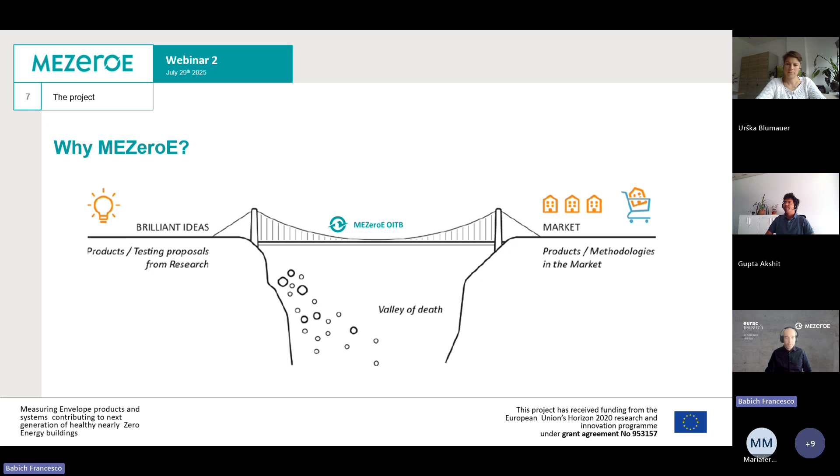The motivation for this project was the fact that in the construction sector, and in particular in the envelope sector, very often there are very good ideas, but they barely reach the market, or they even don't reach the market at all. The European Commission used the image of the valley of death to say that essentially they die before even reaching the market in many cases. So the idea is that the open innovation testbed will create the bridge to make sure these good ideas become products available on the market, with better opportunities for companies and society.

And indeed, the overall aim of the project is exactly this: to create this open innovation testbed with a focus on envelope solutions, and to make sure solutions can reach the market well exploited, well studied, and as fast as possible.

The last two slides are about the three main pillars of the technical offer of the project.

In European jargon, technology readiness level means essentially how close a concept is to a market-ready product, where one means you just have a basic idea, even the principles, and nine means it's ready on the shelf.

With the project, in particular with the laboratories, the red arrow shows we go from TRL 2, just a bit after having a principle, to relevant environment testing, which typically means semi-controlled laboratories. Then we move to TRL 7 and 8, moving to operational environment, meaning real buildings, and that's the focus of today.

Then we have the other three services, which cover standardization and marking as number one. Number three is about support for open innovation uptake in the life cycle. And number two is what we are going to discuss later in more detail: the evaluation of performances in real buildings, which is complementary to providing the buildings.

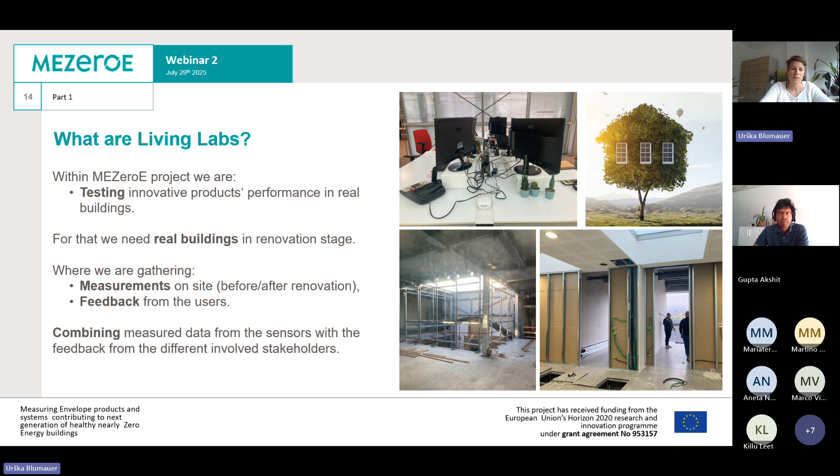Within the project, we have established 3 different levels of living lab test sites. The first step, the pre-step, is done in a laboratory - this was covered in the previous webinar, where the functionality of the products is tested with specialized testing facilities. Now we are adding user interaction.

So within Living Lab Test Site 1, we are testing technology validation, and this is done in lab buildings that are in use. These are usually homes or setups that a laboratory or research institute has, where you just install your product, it's tested for a period of time, and then it's changed and other products are tested there.

The next one is Living Lab Test Site 2, where potential stakeholder validation happens, done through a demo building. This demo building was also set up within this project. We will show you one of these test sites.

And the last one, the most extensive one, is user validation, where we test products in real buildings. These 3 stages also depend on the project's product readiness level. Within the project, we already had 9 industrial partners involved.

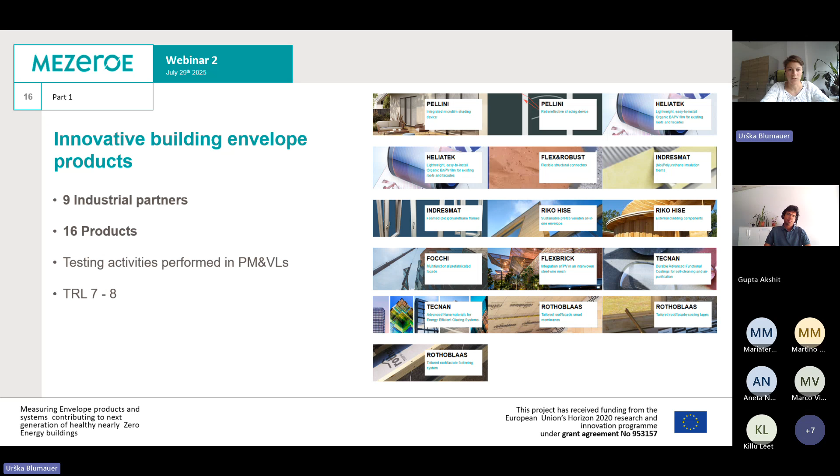They were providing 16 different products that you can see here, and they were in a stage of TRL 7 to 8, so not already on the market, but fully tested within the laboratory setups, and now we wanted to see how they're performing in real building. So they were already part of the project.

The next one is the Living Lab procedure. Here we identified different stakeholders and their motivation, because this environment includes building owners, product manufacturers, the framework that was developed here, and then management team, monitoring and evaluation team, and other stakeholders. We also set up managing this process from building owner application to the Living Lab test site, and then at the end, when everything was confirmed, also the Living Lab implementation.

So first, we go to see the stakeholders that were involved and their motivation. First are the building owners that are providing physical infrastructure, so the building for testing, and for this they get the project free of charge. In return, they have to be willing to participate in monitoring and occupant surveys. The next one are the product manufacturers, who developed innovative building envelope technologies and want to test them in a real environment.

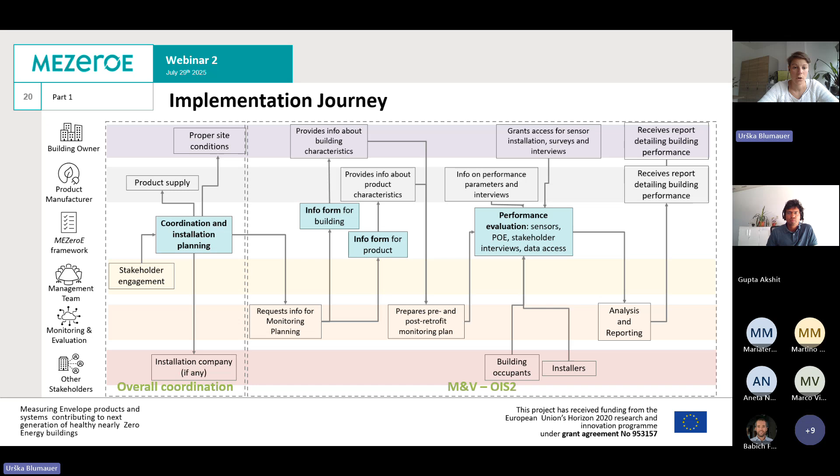Now going to the results of the living labs. We have 13 living labs that are active, coming from private houses, an architectural studio, office buildings, industrial buildings, a modular house, a research laboratory, and a pavilion.

Here on the top right corner you can see a modular house - this is living lab test site number 2, as I mentioned before. All of the others were buildings already in use before, then retrofitted during the project.

Here we are testing 18 products from the industrial partners presented before, and these buildings are coming from 5 different countries: Italy, Spain, Slovenia, Poland, and Cyprus.

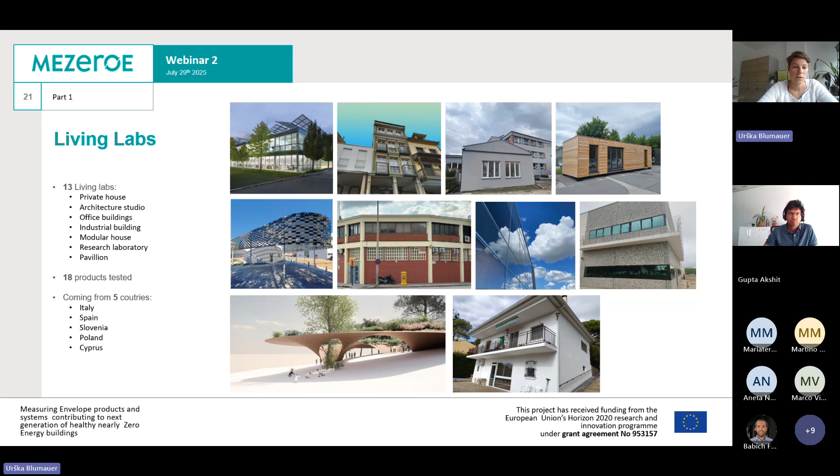Now going into more details, you will see how this is going. We will present a few case studies. First is Living Lab number 8.

It's a residential studio and architectural bureau in Avilés, Spain. This building was built in 1895. It hosts 4 occupants, and when they were applying, they were interested in testing 3 products.

One is the climate control membrane by Rothoblaas, and then two coatings: one is the advanced functional coating by Tecnan, a self-cleaning coating for the facade, and then TECNADIS HEATSHIELD, also by Tecnan, which is a coating applied to windows that reflects infrared light.

Here you can see some pictures from December 2023 when they joined the project. They were already in a renovation stage. It's a protected building in the center of Avilés, so they had to respect quite a lot of demands from the municipality and conservation academy. Here you can see the existing walls and how this renovation was already ongoing.

Then in December 2024, the facade was already finished and the coating was applied. Here, when they were building the roof, a Rothoblaas membrane was incorporated. You can also see the windows waiting to receive the coating from Tecnan for infrared light.

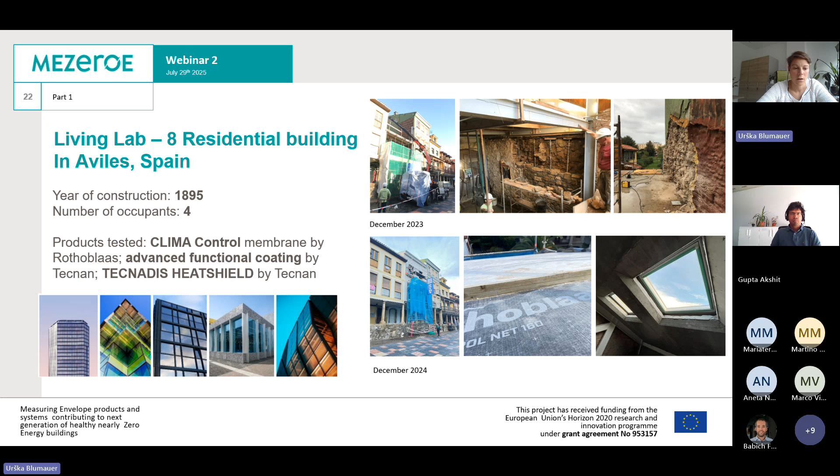Case number 2 that I wanted to show you is Living Lab number 21. This is an industrial building in Barcelona, Spain, constructed in 1973. There are 15 occupants using it daily, and the product tested here is KLIMA PUR windows by Indresmat, whose specialty is that the frame is made from bio-based PUR material.

You can see here in June 2023 how the building looked, when they were changing the upper side of the windows and then also the middle one. Then in May 2025, when they started changing the windows, you can see some stages in between, and here the new window installed. They have changed the majority of the facade, but this is just to give you a feeling of it.

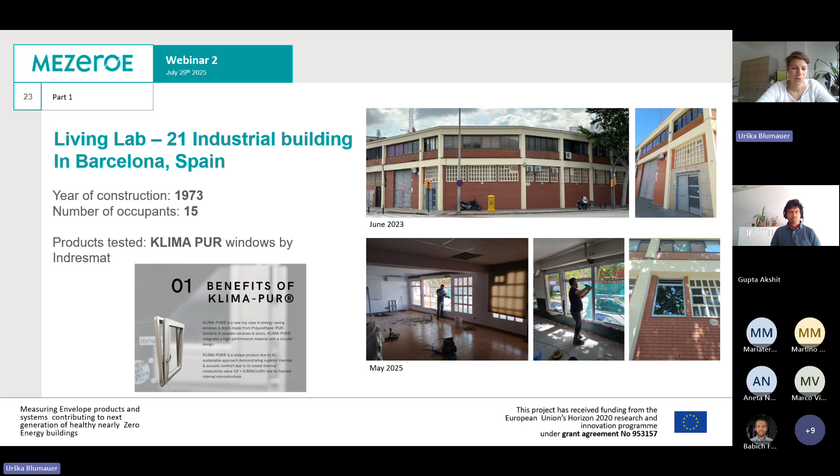The last case study presented here is Living Lab number 25. This is a research laboratory in Krakow, Poland, presumably built in the 19th century, so it's over 100 years old. It has some severe damages to the construction.

Renovation happened during the school break, so between June and September. They used some products from the project, but they also renovated the facade, adding thermal insulation and the finishing touch, so now it's completely renovated.

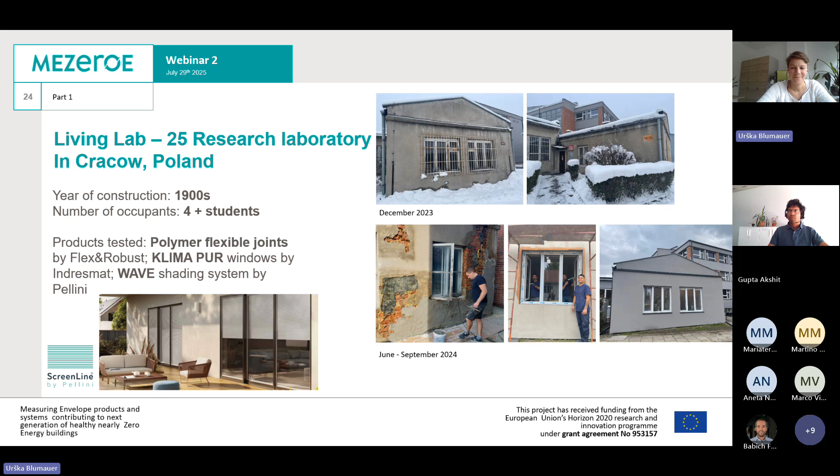So I will speak about how we are actually now following the evaluation of these living labs. What are the criteria? How do we carry out the monitoring on site? And how do we involve the different stakeholders, which you have seen in the previous slides?

Briefly about myself, I'm Akshit. I'm a researcher at the Energy Efficient Buildings Group at EURAC. I'm working in the MEZeroE project, mainly on the real environment product testing through this Open Innovation Service, or OIS2, which is mainly for monitoring and performance evaluation in real buildings, which we are calling living labs. My research areas are indoor environment quality, focusing on air quality, thermal comfort, and natural ventilation in the built environment, using different methods like CFD, field studies, chamber studies with participants and mannequins, and BIM implementation and research as well.

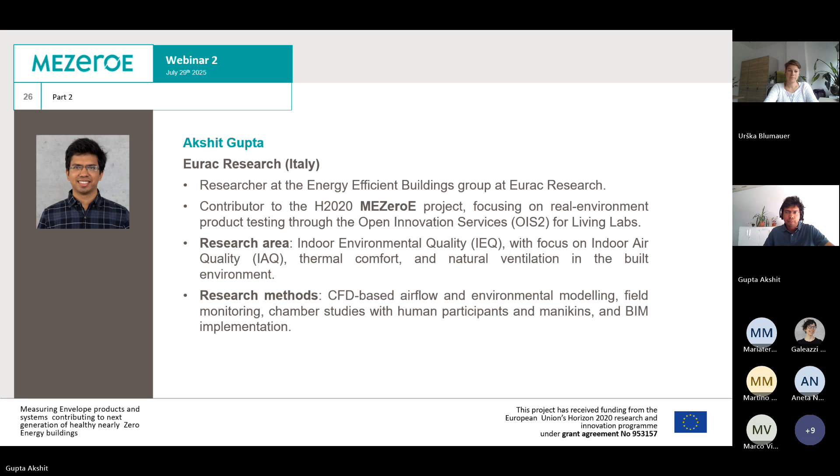So why do we need a service like this? As you have seen, there is a need for testing the products in a real environment. So in order to verify the performance and test the products in real operating conditions, there is a need for a service which is standardized, which covers different requirements of manufacturers, owners, different users.

Because right now, what we have also noticed in our research is the market is very fragmented. There are many solutions available, but they are in different pieces, and a user needs to contact different people and find their agreements. So it becomes complicated.

That's why in this open innovation framework, we have gathered 3 research partners and 3 monitoring solution partners, and we have come up with a standardized protocol for measurements and verification, focusing on building envelope performance in real buildings, the behavior of the envelope, indoor comfort studies, both for continuous and on-spot monitoring. So how it works, it's led by EURAC.

So all the requests come to EURAC first. We have these protocols which are developed by the 6 partners. They are adaptable, they are fully GDPR compliant. And what it helps is it facilitates this collaboration between the different stakeholders, between manufacturers, owners, the different monitoring service providers, and because of different expertise, we have clear insights or analytics and how to visualize these performance criteria.

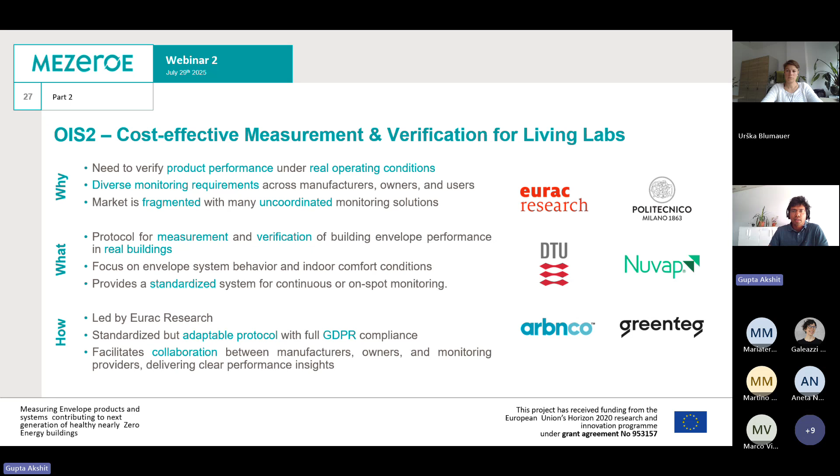So first step in all this is to identify the customers and identify what their problems were and are. So we have the product manufacturer or product supplier who's looking for evidence. They want to apply their products in real environments, and they want to know what is it that they could improve, what's not working, what's working.

The building owners are lacking data information on baseline performances. They might need to improve the comfort or the health of the building, because maybe there are pollutants inside. So they are also in search many times for a service which is robust and includes the different domains.

Real estate investors also need compliance with the energy performance and carbon reporting legislations. And there are also new entrants, new product manufacturers who would like to introduce a new product, as we saw before, the valley of death. So there are new products which are not arriving to the market. They need a data driven approach, so they can introduce new products.

And because of these real building applications, they can perhaps easily convince building owners and contractors to install their products because they can show examples.

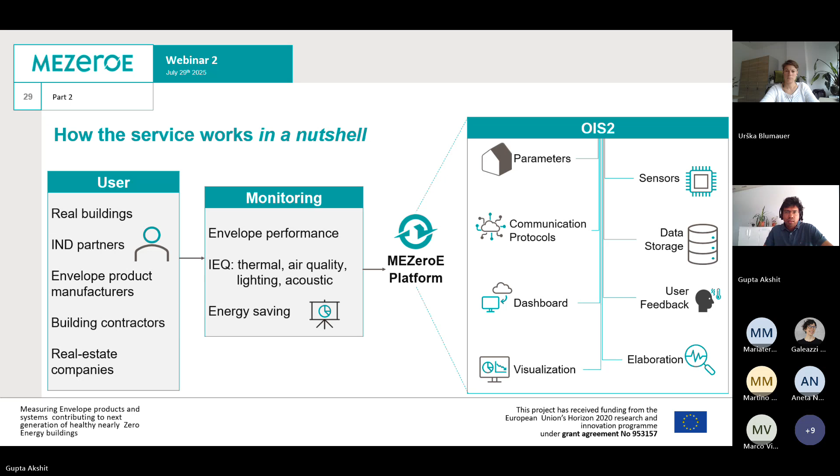It's better if I go to the next slide and I show you the different pieces. So one of the pieces is a very important piece, sensors, where we can monitor the different parameters, which can be air quality parameters, thermal comfort parameters, acoustic, lighting, or envelope performance parameters like heat flux, surface temperature.

Other pieces can be the feedback from the users or different stakeholders, connecting to different systems like the BMS or photovoltaic panels or the already existing energy consumption meters.

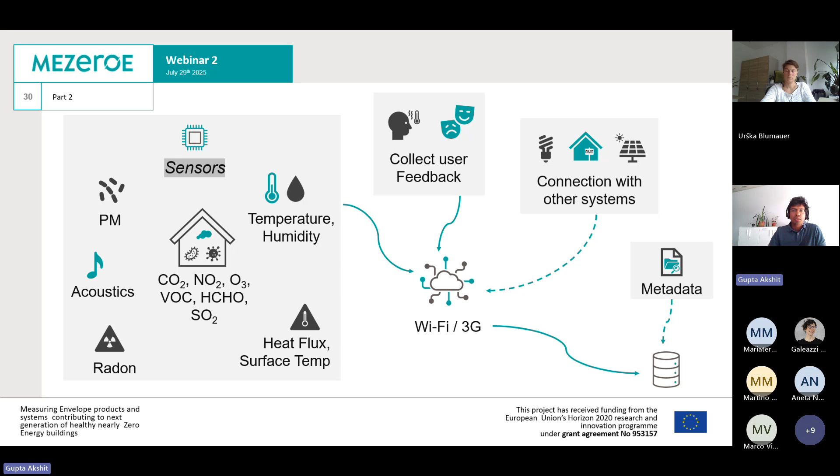These are connected to either a Wi-Fi or a 3G platform, which sends the data to a GDPR compliant database, managed by EURAC and connecting with the metadata. The one we are using is InfluxDB, from which the journey towards elaborations and analytics starts.

In the dashboard, user access management is taken care of - who gets to see which data, the reporting, which indices to be used, and which kinds of visualizations are interesting for which stakeholder. So all this is covered in the dashboard.

How the data management works: imagine an x-axis which is a time axis, before we enter the living labs and in real time. On the transversal axis, on one side we have the building and the product, and on the other side we have the occupants. So before entering the living lab, we collect information from the building and product.

There are standard forms we have created where we ask about the context of the building, what it is the product manufacturer wants to test. So there are these surveys we carry out.

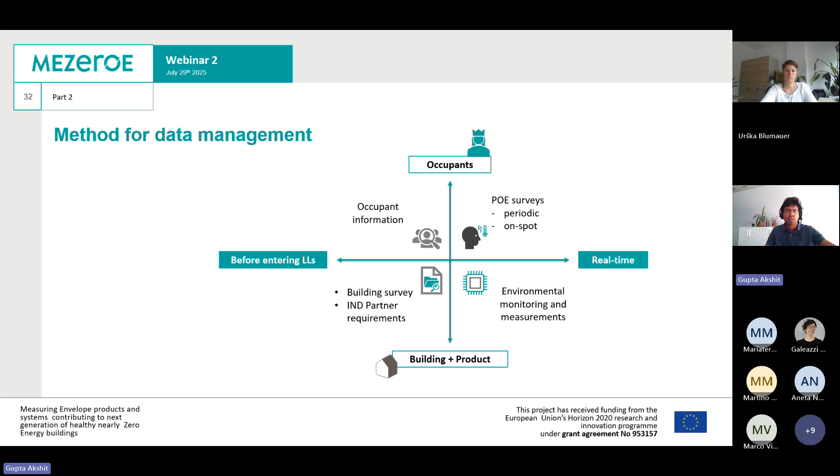From the occupant side, we ask information about the number of occupants, the nature of occupants, their schedules, various things which we need for the next step - defining the monitoring system, defining the surveys, how often we do them, and what kind of questions we need to ask them. All this is done simultaneously with different stakeholders at different points, depending on the different context.

Then we have already decided the different performance criteria, which can vary based on the product in question. Either we test envelope performance, for which we measure certain parameters and have certain KPIs, or for thermal studies we again have certain parameters. We can also carry out post-occupancy evaluation surveys - that's what POE stands for.

Then we have KPIs based on different models of thermal comfort, for acoustics, for air quality, for lighting. So based on the product, we decide which criteria are important, which parameters need to be measured, and which KPIs are interesting for that particular building and that particular product.

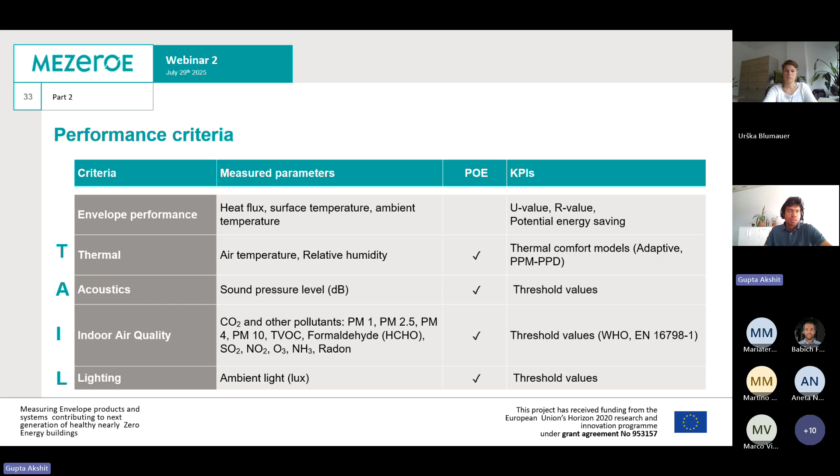The thresholds are based on a scheme called TAIL, from a paper by Professor Wargocki, and we use these thresholds to measure the different indoor environment quality domains, divided into categories: thermal, acoustics, air quality, and lighting. For different seasons and different building types, there are different threshold limits.

These are then used to give out reports and compare the performance of the building before renovation and after renovation. So this is one of the performance criteria.

The next performance criteria is questionnaires, or involvement of stakeholders, in order to understand their experience, their needs, and to get feedback, which is done in three phases. We ask about their experience of participation, implementation from the transition from lab to a real setting, and testing standardization, which can be different for different countries.

Here we have mainly four stakeholders. For each stakeholder we have a certain set of questions. For product suppliers, these pertain to product improvement, market insight, whether there was a gap between lab and real settings, and specification adjustments.

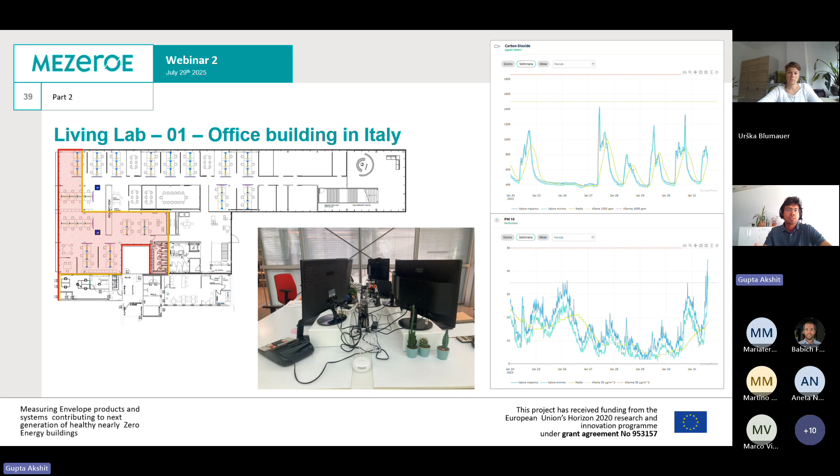In this office, you can see the sensor placed in between the two working desks. We decide together with the product manufacturer and the building owner about the location of the sensors, how many sensors, what they should measure. So it's done on a case by case basis.

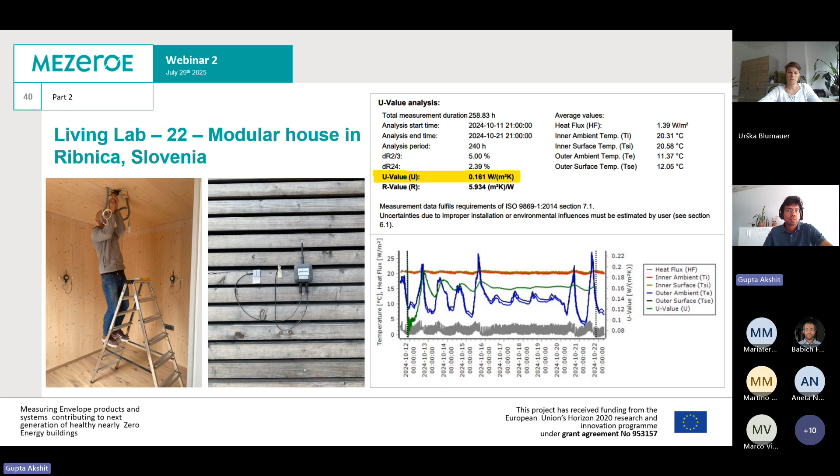Example from Slovenia of the modular house: we measured the envelope performance, we measured U values of the different walls, different typologies of walls, and the roof.

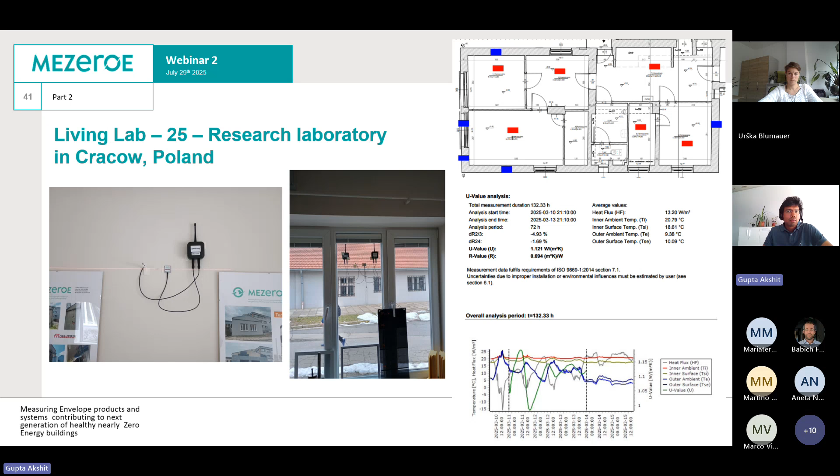For the research lab we saw before, we have sensors for both indoor environment quality and envelope performance. And these are automated reports generated from the sensor providers.

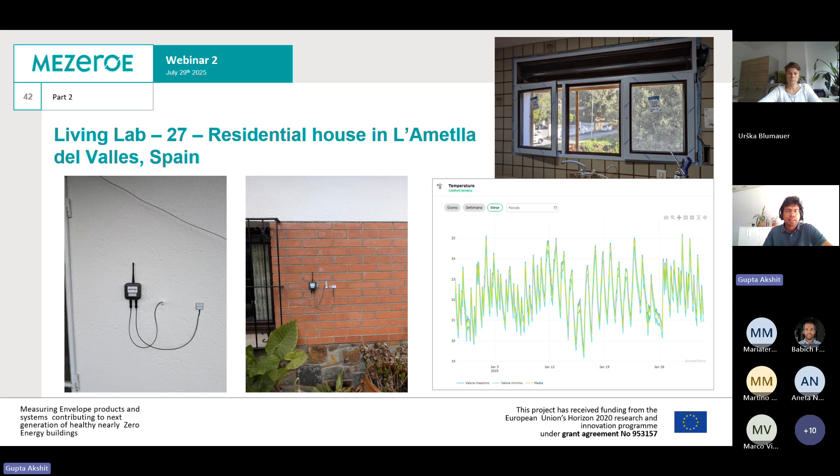So overall, this is how the service works. We can integrate different sensors, which enhances versatility and applicability of different monitoring systems. It's specialized, comprehensive, includes standard protocols and hardware specifically for building envelope influence and performance, pre and post retrofit analysis.

The aim is to always have data driven building performance because it provides baseline indicators, the improvements which happen because of the product, which can be used also for certification, and at the end an intuitive dashboard which makes the interpretation and decision making easier for the stakeholder.